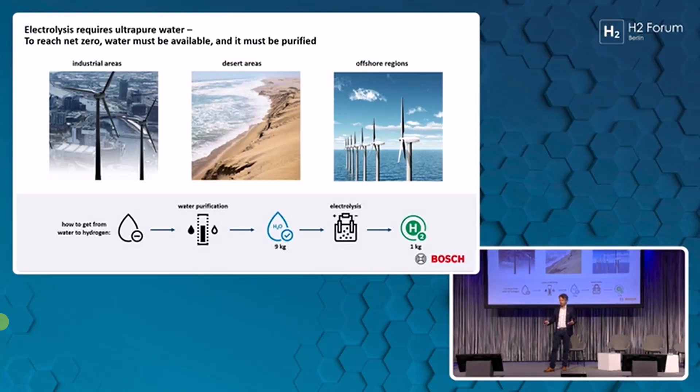This use case for water purification couples with the electrolyzer in sometimes remote locations. It has very tough physical boundary conditions the technology has to be able to cope with. One thing is intermittency: start, stop, and unexpected behavior of the energy. This is something the technology needs to be able to handle. The second thing is serviceability. So we need in remote locations a technology that is very robust and needs low maintenance. Question is, can the water purifier guarantee that?

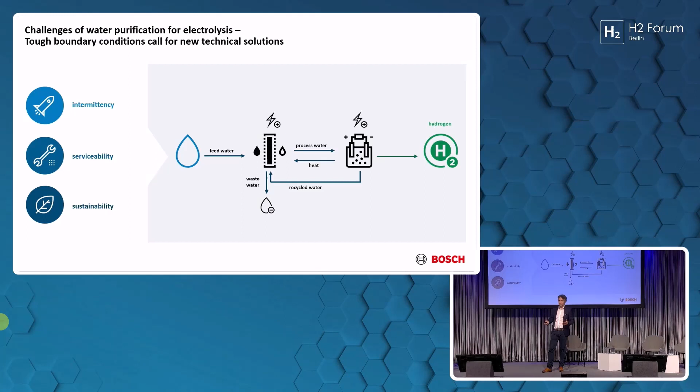And the third thing is sustainability. So a green hydrogen approach must also assure that in the water purification there's no harm to nature, and we don't take away water from other uses. So those 3 points are important for a water purification device, and at Bosch we made up our minds about what can be a good technology, and we are entering the market with a solution I'm showing here on the screen.

This solution is containerized, and it combines a mechanical vapor compression distillation with an electrodeionization unit. You can imagine this is a container. You input water, this can be seawater, you get out ultra pure water to process for the electrolyzer, be it PEM, be it alkaline or other electrolysis technologies.

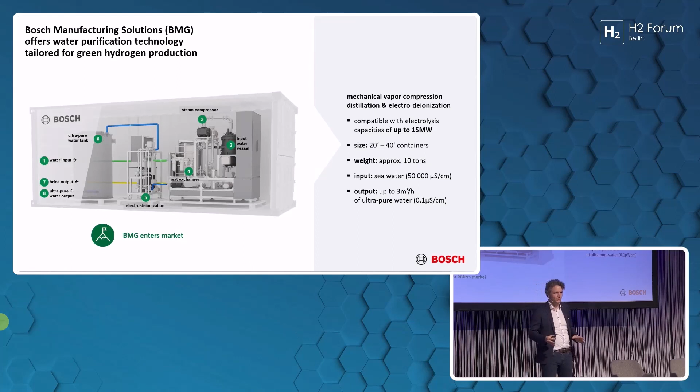We have sized this water purifier to supply the process water for electrolysis up to 15 megawatts of capacity. And it weighs about 10 tons. It takes in seawater of 50,000 microsiemens per centimeter, and the output is ultra pure.

One thing that you may wonder if you hear distillation is evaporation and condensation. That takes a lot of energy. However, we have implemented in our device recuperation of this latent heat needed for evaporation, and this results in the fact that we need a very small fraction of the energy of the entire system coupled with the electrolyzer.

To produce a kilogram of hydrogen, an electrolyzer needs around 50-60 kilowatt hours. The water purification coupled to that electrolyzer needs only up to 0.2 kilowatt hours. This means we have a really marginal amount of energy that is needed here for the water purification.

And rather than trying to save any energy there, we advise to focus for water purification on its robustness, so that you make sure you have no downtime ever of your electrolysis system due to any failure that you might have in the water purification.

We want to point out some features of water purification technology for hydrogen production that we consider are the most important ones. The one has to do with the intermittency of renewable energies. It must be dynamic. So any changes in the load, the device must be able to follow within seconds or up to a minute.

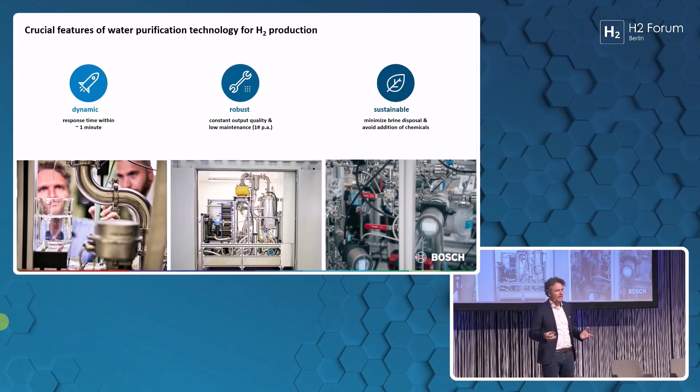If you look at this one example, and this is a very innovative, exciting example, the decentralized offshore hydrogen production, it becomes immediately clear that here, where you turn seawater outside on the ocean into ultra-pure water to be processed by an electrolyzer right there at the wind turbine, you do not want to add any chemical to the process. A state-of-the-art, membrane-based water purification device does need lots of chemicals. We want to make sure by adding no chemicals, this is a sustainable approach.

I mean, with green hydrogen, we're all here because we want to be able in some decades to turn to our grandchildren and say, back in the 20s, we turned this climate change thing around and we introduced green hydrogen, but we don't want our grandchildren to come back to us and ask, why didn't you care about the quality of the water? So no chemicals to be processed here, maximally robust and low maintenance in order to be able to have a maximum uptime with this green hydrogen production scenario.

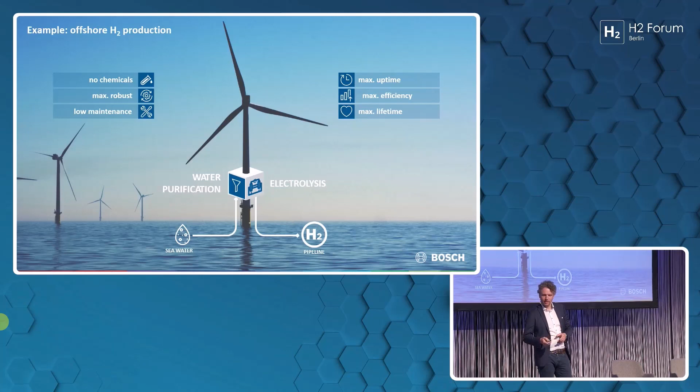So let me point out what we do at Bosch Manufacturing Solutions. What I just presented is a water purification device that we are entering the market with. We also have at Bosch Manufacturing Solutions the integration of electrolysis systems for specialized applications, including H2 testing. We also have production equipment and testing solutions for hydrogen injection components. We have them for fuel cells, for the mobility sector, and also for the stationary energy sector.

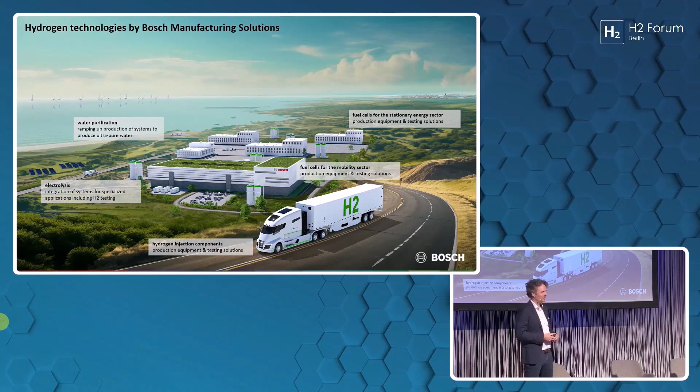Thank you, Wolfgang. One of the questions is what happens to the residues of the purification process? So, for example, the brine. Right. So, of course, when you have input water, and be it in that example, it's seawater that I just showed, you have the ultra-pure water, but then you have a concentrate of the salts, and you have to dispose of it. What's important there is to comply with regulations.

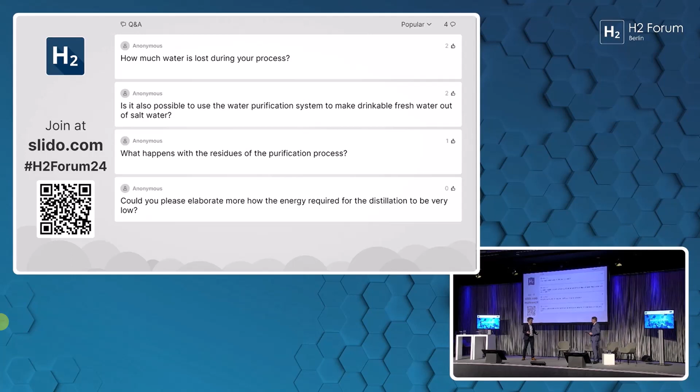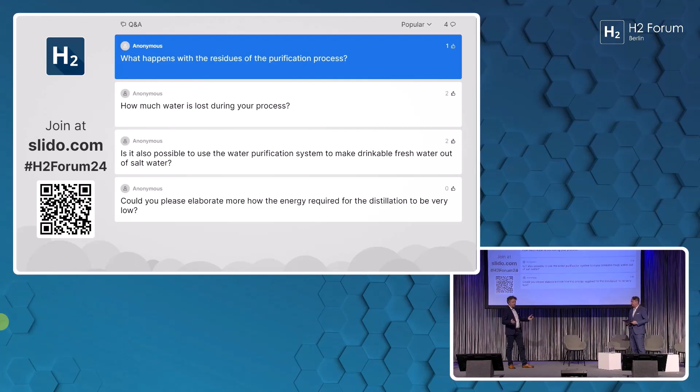And the regulations, they may forbid that you add any chemicals that you need for the process into the environment. And so it's always an advantage to be able to say that in the process there are no added chemicals. What really happens then in practice is you dilute this concentrate again and then dispose of it in the environment. Into the sea. Right. In this example, and in other examples into the sewage system.

Okay. How much water is lost during your process? Right. Yeah, that very much depends, you must say. So in this setup that we have now, we have a 50% water efficiency, but that's really by choice. We can concentrate up the water quite high, and if needed, we can actually concentrate it up to nearly 100%.

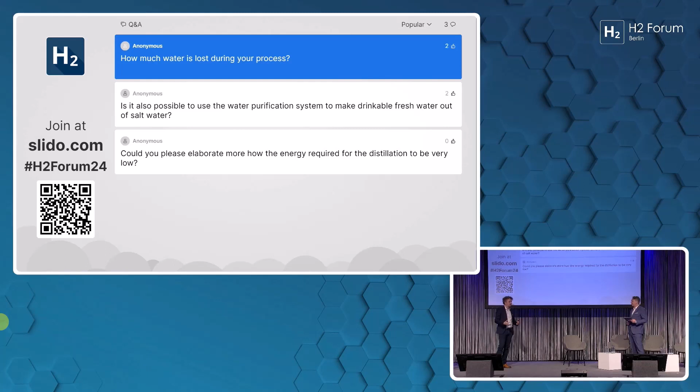There's technologies we could add to this. This is the so-called zero liquid discharge, which is an innovative technology we could add to it technically. But this is possible. But right now, at the moment, we have 50-50. So you give me 2 liters, 1 liter for the electrolyzer, and 1 is disposed of.

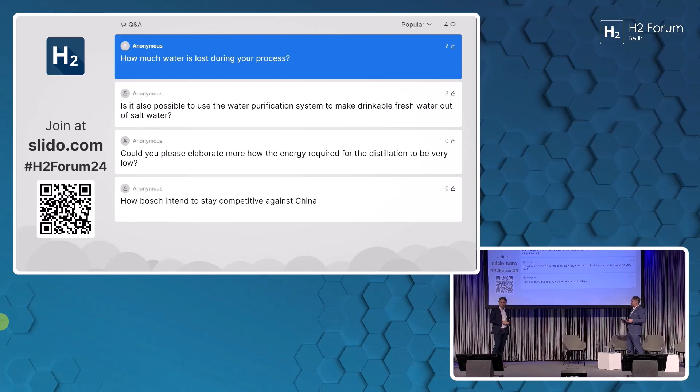Okay, good. Is it also possible to use the water purification system to make drinkable fresh water out of salt water? Generally, yes. So the distillate water that we produce, it can be remineralized and then be consumed as drinking water.

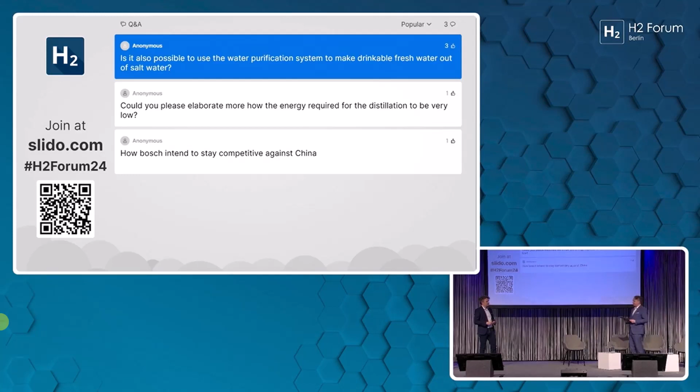And there are ways to do this. And I would consider this really as a chance, as a dual use case to produce water for green hydrogen production, but also for the people that work right there. I mean, we're looking at producing hydrogen in areas which are water scarce, and this is a possible dual use case. Okay, yeah, very good.

Could you elaborate again on how the energy required for the distillation is very low? You said normally you would need a lot of energy. Could you make your point again why it is low? Sure. So the distillation of water is usually energy intensive. What we do is we evaporate water, that needs lots of energy.

We have then a steam compressor that raises the pressure on a higher level. This also means that the condensation that then happens is on an elevated temperature. And that means condensation happens at a hotter temperature than the evaporation. Then you can use heat exchange principles to win back that energy. That's the recuperation I mentioned. And this ends up in the end to be an energy efficient water purification method.

We must say it's more energy consuming than a cold membrane-based technology, but like I mentioned before, we are still in a range that the energy consumption for water purification is tiny compared to the electrolyzer.

The time is running out. There is one question, I mean, this is a mega question. Would you like to make any short, specific comment on that, and then ask maybe the person who has asked that question to join you to get into a longer discussion? Is there any particular point you would like to highlight on the question? How do you, with your applications, intend to stay competitive versus other competitors, for example, Chinese competitors?